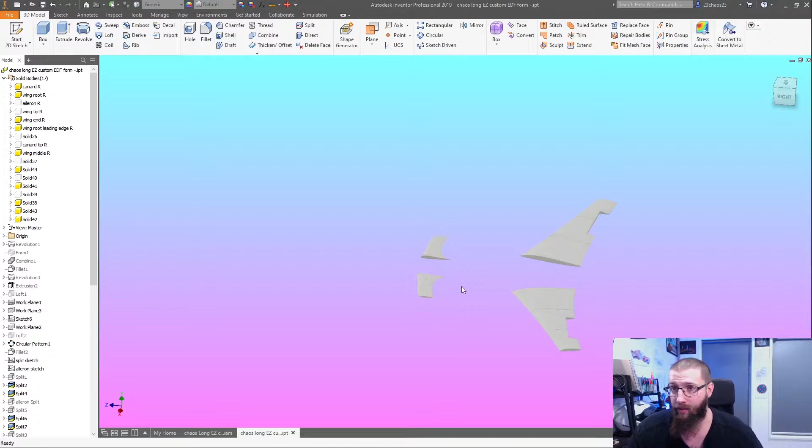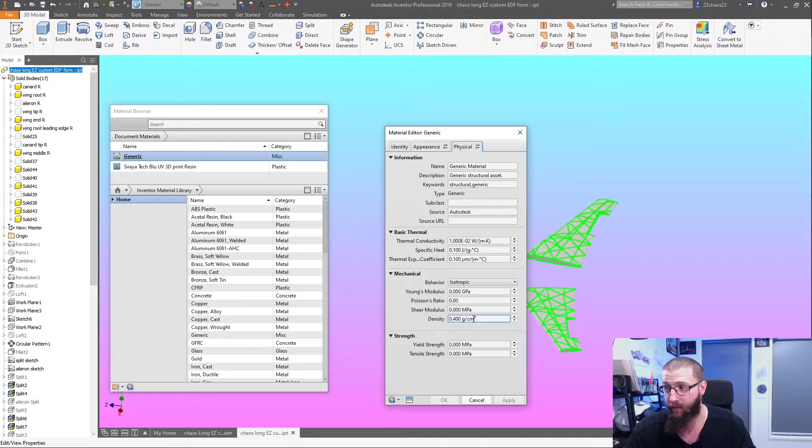So let's have a quick look at it. Now, at the moment, I have the generic default materials property applied to this model. But that's handy because I can just come in here and select generic, click edit, go over to physical, and in here in physical, I can set the specific gravity of something. Density, 0.4 grams per cubic centimeter. So I've got it set for the specific gravity of PLA, specifically lightweight PLA, the foamy stuff, the show-off stuff. Anyways, right? Specific gravity set.

These are not all the parts of the plane, obviously. I've hidden things like the canard tips, the wing tips, the main body, the ailerons. The reason being is that they have not been hollowed. The shell tool, it's a bit finicky sometimes.

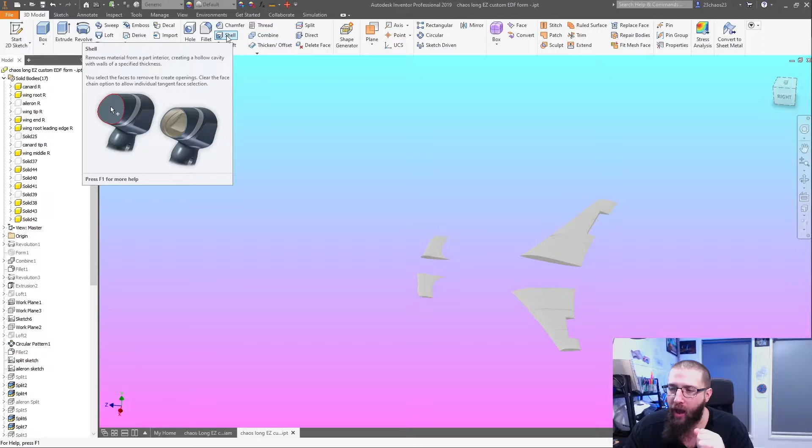It has issues, right? I don't think the shell tool had a good relationship with its father when it was younger. There's just something about it. It's not right.

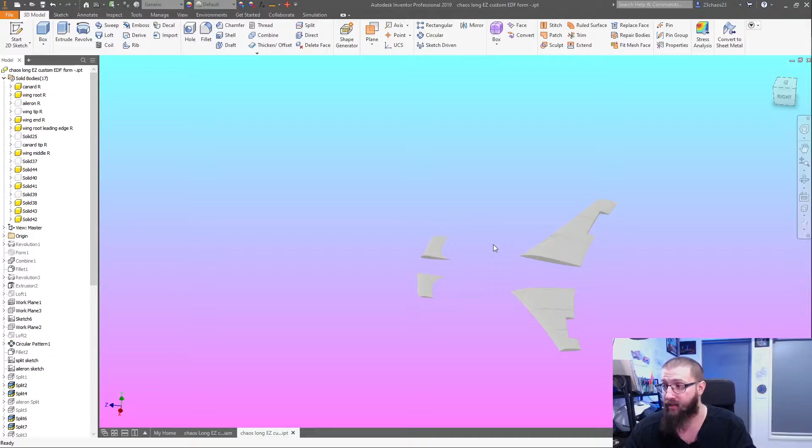Anyway, moving on. So these are all the parts that have been hollowed and all the parts that have internal structure. So essentially, they're done minus any holes for spars, push rods, yada yada, all that stuff, right? So they can still essentially be lighter than what they currently are. Keep that in mind. They could still be lighter than what they currently are. So selecting all of these parts, we can right-click Properties, and we get a weight.

So now just take a seat. Take a moment to look at this number, right? This number right here, 0.148 kilograms for all of the wings and the canards. That's less than 200 grams for the wings and the canards. So taking that into account, we add, say, maybe, I don't know, another 100 grams for the wing tips and the canard tips, right? Because you'll hollow those in your slicing software, right?

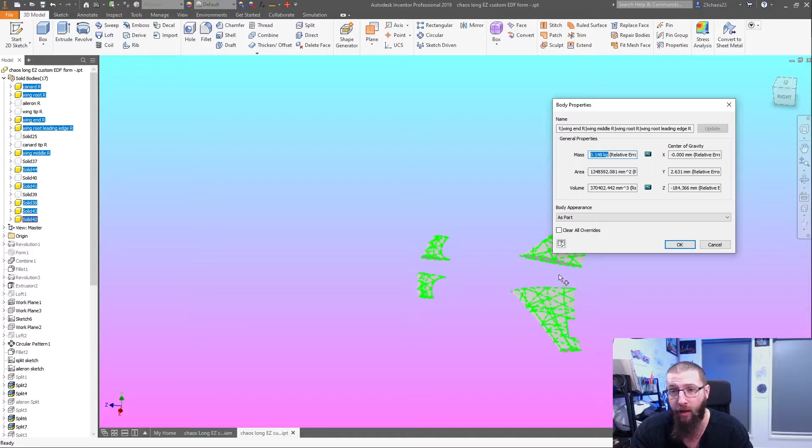I'll just add the structure for the spars and stuff, and in the slicing software, you would go in and hollow it, and you just do your wall thickness, and you maybe have an infill for some structural integrity, but generally, you can expect the tips and the canard tips to be around 100, let's say 150 to be generous. So now we're up to 300 grams just for the wings, including the tips. Now, if we take into account the body, because it's very large, you'd think, oh, that's going to be really heavy, but it's going to be mostly hollow.

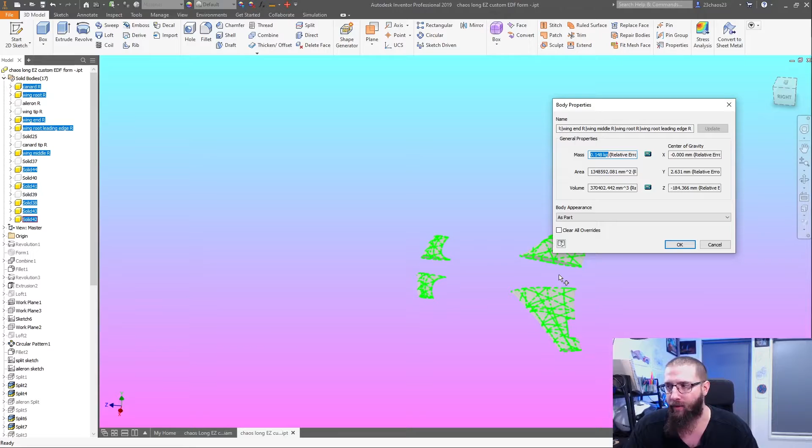There's going to be far less structure in the body than the wings. And the reason for this is tubes transfer stresses along their surfaces differently to wings, right? Wings are mostly flat area surfaces. They bend in different ways. A big tube, or basically the body of the aircraft, can take more stress, right? Without having as much structure. So the whole body, let's be generous, let's say 400, maybe 500 grams.

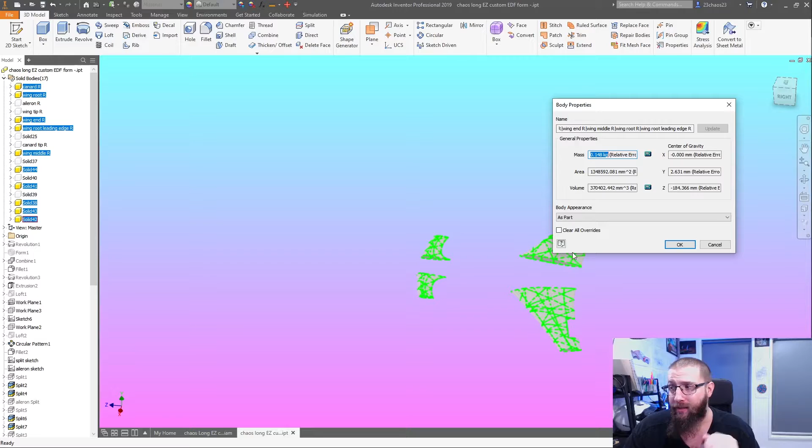Now, we're talking 800 grams for an aircraft that's what, 1.4 meters in wingspan? That's impressive. That's going to be impressive, right? I mean, let's put the wing tips back in so I can grab a number there.

And look at that, 1.46 meters, right? That's basically 1.5 meter wingspan. This is a fairly sizable aircraft.

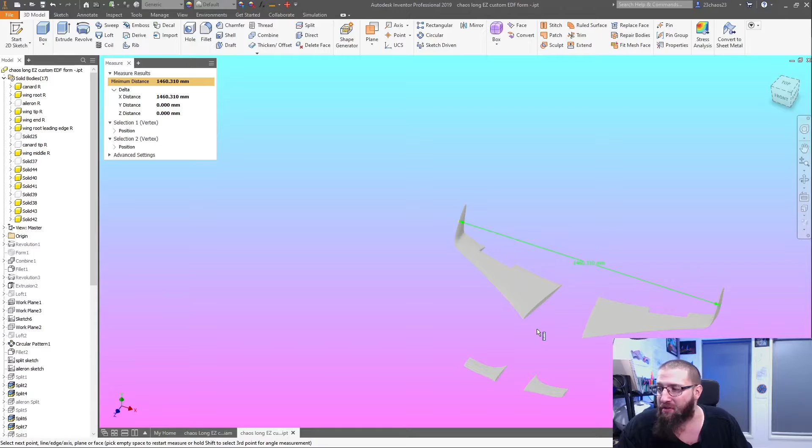When he created a monster, and it was just tortured by the people. I'd never read Frankenstein, so I can't really say. I'm just pulling that out of my butt.

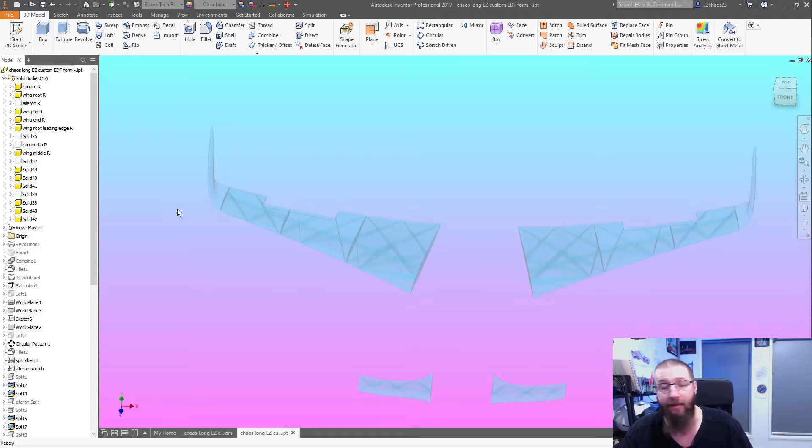Anyways, right, so that's lightweight PLA. Now, here's one I prepared earlier, a materials property for Siraya Tech Blue. This is what I've been using on the Draco to get information on the material properties and everything. So let's just go through and hide those wingtips again, because oh boy, it'll be heavy if you just calculate a solid mass like that. These wingtips probably weigh more as they are now than all of the rest of it. In fact, one of these probably weighs more than all of these combined.

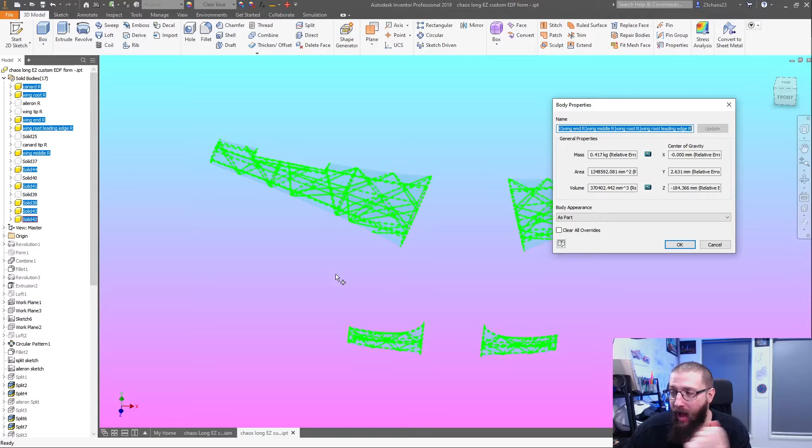Right, so we've got those all hidden. I'm going to run through and select them all again. Properties. Ooh, look at that. 400. Quite a bit heavier. That's not so good. What's going on here? But now remember, I mentioned with resin printing, I can cancel out maybe 50% of that weight. So let's say 200 grams. Because all of that internal structure is solid. I need to fill all of that with holes, right? I need to lighten the crap out of it because I don't need it.

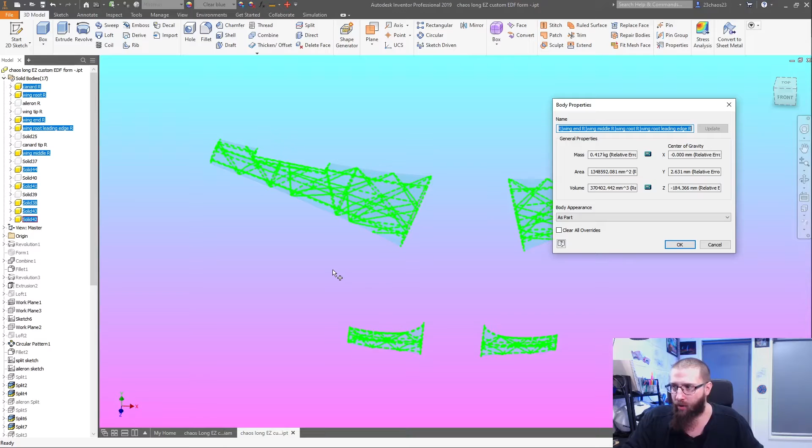The material transfers stress differently. It doesn't yield. So I don't need to have reinforcing material behind material behind material to transfer stress because it's not yielding. It'll just run along the surface through the material and transfer wherever it distributes. So yeah, we can say maybe the resin version will be 30% heavier. So yeah, there you go. It's going to be literally 1.04 kilograms, right? So 1,040 grams. So now that's some impressive stats, right? This thing's going to be pretty good. Well, I'm hoping so. That's what I'm working to.

But now here's some key things to remember. Remember how I've been going on about the material difference between resin and plastic, how plastic yields and bends, and resin generally just snaps when it reaches its breaking point. What happens when you mix resin with carbon fiber? We all know how strong carbon fiber is, right? This same aspect applies to a resin printed part with a carbon fiber rod through it, or a carbon fiber tube through it. It transfers the stresses directly to the carbon fiber and doesn't have the opportunity to reach its yield point where it snaps. The carbon fiber takes the load. So it has all the benefits of being a fully carbon fibered form without the drawbacks of being that expensive.

Well, maybe, the resin printer is quite expensive and the resin's quite expensive, so it's pretty close in the runnings. Yeah, probably. Anyways, so considering the differences, with lightweight PLA, you have to have more structure, more mass in your structure in order to transfer stresses to your carbon fiber tubes and your other load-bearing structures. With resin, it transfers that energy far more efficiently to your load-bearing structures. You have far lower yield and bend and deform rates, which means this plane will outperform in resin than it will in lightweight PLA. I'm going to make that claim right here, right now.